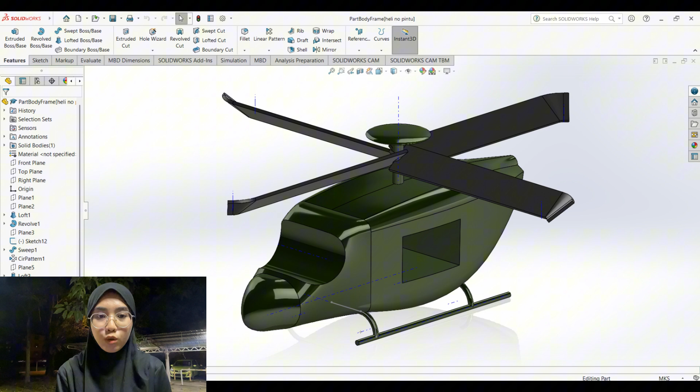Set the lines to tangent with the circles and trim any unnecessary sections. Add 3-point arcs at the top and bottom, making sure they are coincident with the sketch. Once all parts are complete, apply an extrude boss and your main body design is done.

Next, for the blade design, we start by sketching the airfoil profiles using the sketch tool. This defines the aerodynamic shape. Then we use the loft boss or base tool to create the 3D blade by connecting multiple cross-sections. To refine the shape, apply fillet for smooth edges, ensuring better airflow.

Next, we move to the hub design. The hub is created using the extrude boss or base, or revolve boss or base tool, to form a cylindrical base. Add holes or slots, use the hole wizard for attaching the blades and apply chamfer or fillet to reduce stress concentration and improve aesthetics.

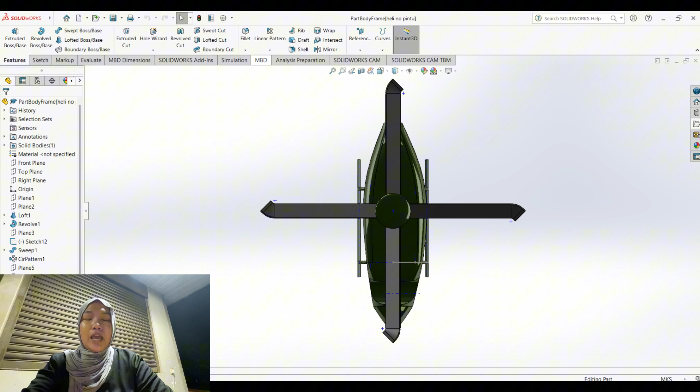Once the components are ready, we assemble them in the assembly environment. Use the mate tool to position the blades on the hub accurately.

For the first step, select plane 1, the neck point of the heli, and click New Sketch on the plane 1 menu.

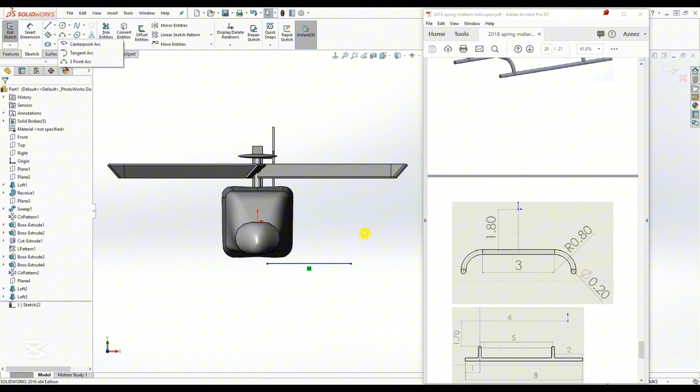Draw the bottom part of the heli and let it snap at 180 degrees. Then pick 3-point arc and randomly select any part.

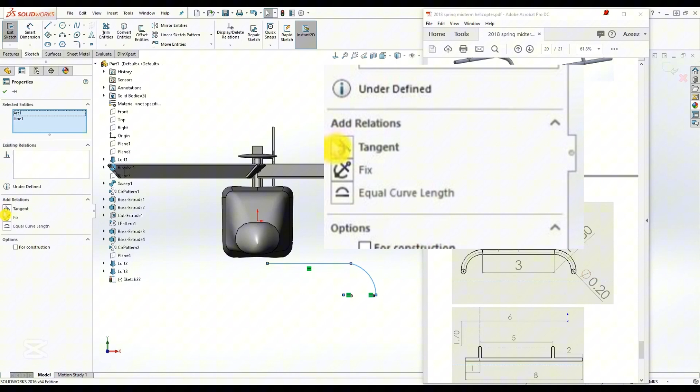Realign the bottom part and the radius, making it horizontal for the bottom and the upper part vertical to each other. Don't forget to make it tangent from the arc to the straight line to ensure they are connected. Realign the straight line vertical to the origin.

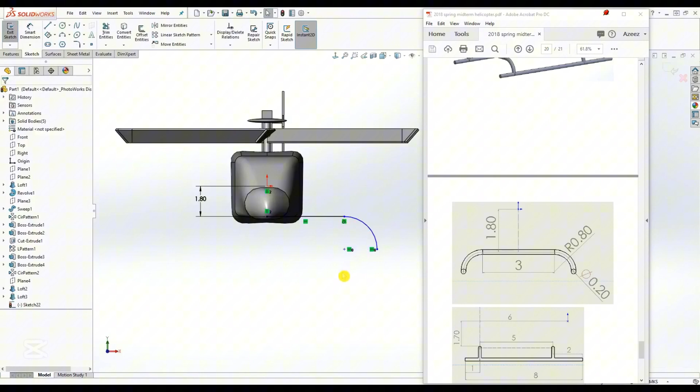Set the height of the heli and landing gear using smart dimension, around 1.8 units. Use smart dimension on the straight line sketched before, set around 1.5 units. Set the radius of the arc to only 0.8 of the smart dimension.

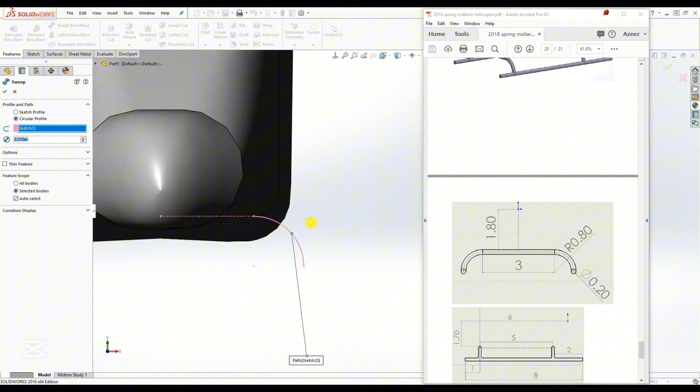Exit the sketch and use the sweep boss feature. Below it, set a different path and profile. Click on circular profile to make it look like a tube. Select the sketch and enter a value of 0.2 units, then enter.

Keep in mind, in the first part we created a new sketch on plane 1 just to make sure the sketch has its own boss, as it's been given the volume to stand alone by itself. This leads to no errors once extruded, since it is not connected to the other part.

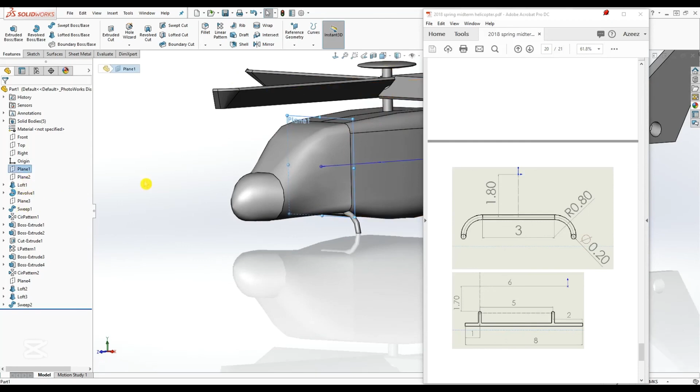Select the reference and select plane 1, then flip the offset. Offset it by 5 units and enter.

Create a new plane, copying the sketch by selecting the previous sketch of the sweep and using convert entities. Redo the whole session.

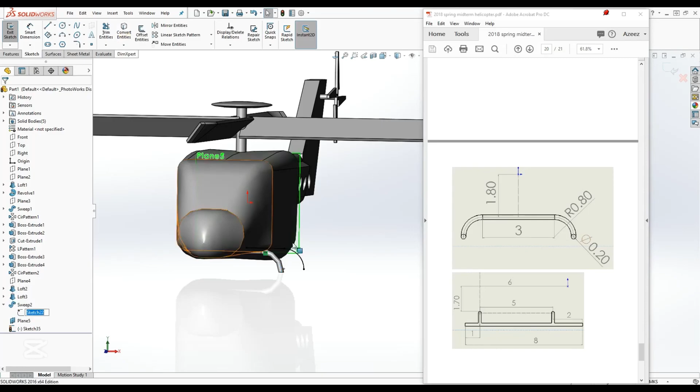Open a new sketch on plane 1 and reopen the latest sketch as a guideline. Draw a circle and set the dimension around 0.2.

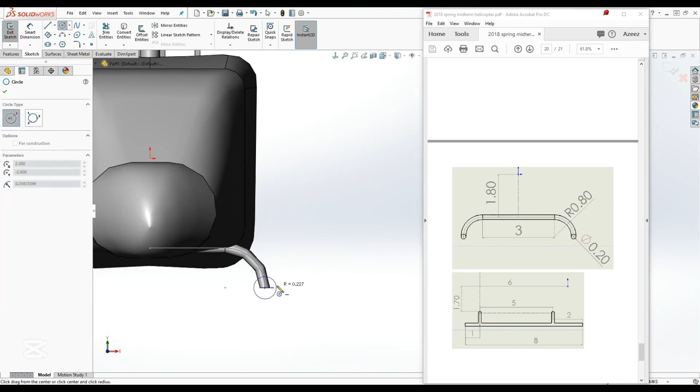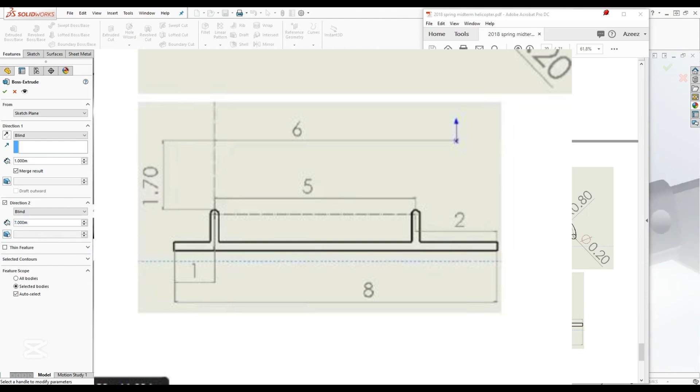You can extrude it for the front as 1 unit for direction 1, and pursue direction 2 for 7 units. In total, direction 1 plus direction 2 gives you 8 units, which is the dimension we need. After that, you can mirror it.

And that's all how you draw the landing gear.

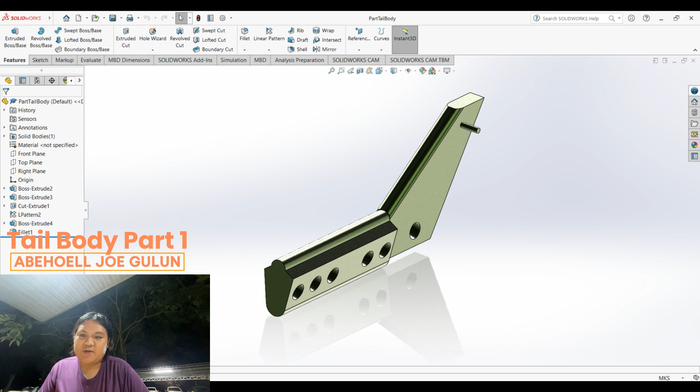So now I will show you how to create this tail body step by step in SolidWorks. First, start a new part and select the front plane, then use the rectangle tool to sketch the base profile. Define the dimensions based on your design needs, ensuring accuracy, and once done, use the boss extrude tool to extrude the base to the desired thickness.

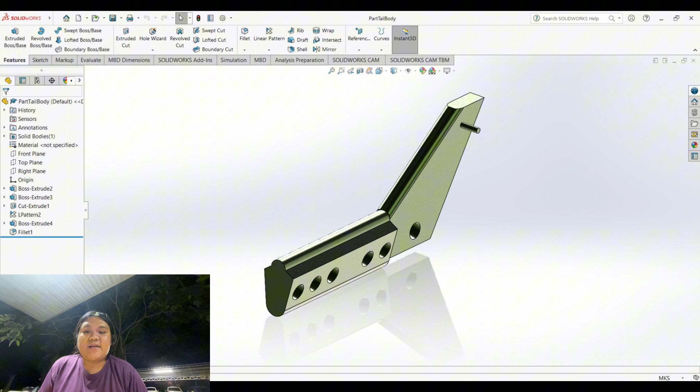Step 2: next, to add holes to the base, create a sketch on the top face. Use the circle tool to define the positions of the holes and apply dimensions for precise placement, then finish off by using the cut extrude feature to create the holes.

Step 3: to build the inclined sections, create a new sketch on the side face. Use the line tool to draw the angled profile, ensuring it aligns with the base. Then apply the boss extrude tool to extend this sketch upwards.

Step 4: to smooth the sharp edges, select the edges and apply the fillet tool. This enhances the part's durability and gives it a professional finish. Adjust the fillet radius as required.

Step 5: where design requires symmetry or repetitive features, use the mirror or linear pattern tools. This saves time and ensures uniformity in your design.

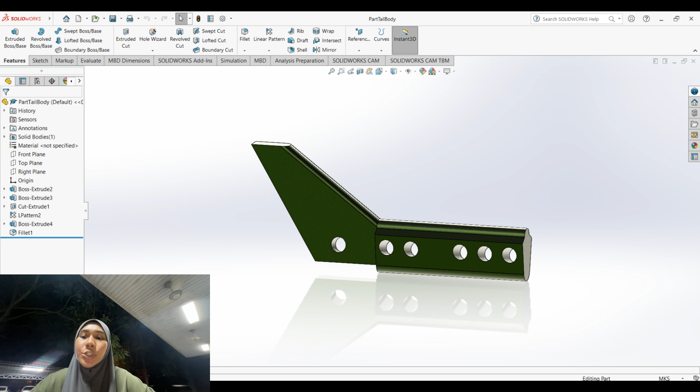For the final step, using a combination of boss extrude, cut extrude, and fillet features, you can easily create complex parts like this in SolidWorks. That's all from me.

Cockpit on helicopter. First, we need to sketch the outline. We sketch the outline using the front plane or top plane to create the cockpit basic shapes, whether rectangular, circular, or rounded, and then we also use tools like line, spline, and circle for detail contour. We also extrude the body using extruded boss base to give features and depth to our design.

We also add openings for windows. We sketch window shapes, which can be rectangular, circular, or custom based on our design on the cockpit surface. We also add details on the platform, tires, and the window.

Then we assemble components by importing or modeling additional components like dashboard, instruments, windows, and the platform. We use mate features in an assembly file to position the components.

We also apply material and appearance by using appearance to assign material like metal for panels, and we also apply realistic texture for better visualization.

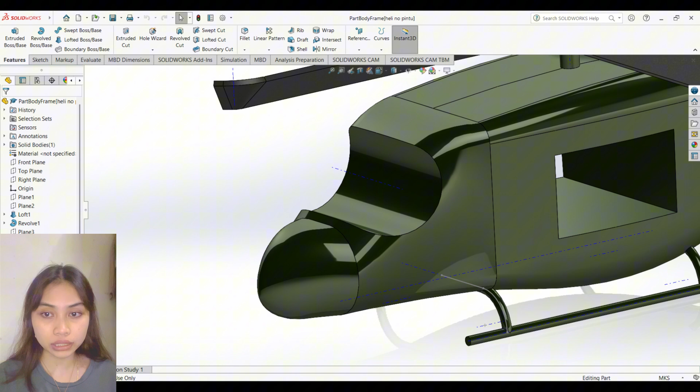We also add final touches, add fillets and chamfer to edges for a realistic look, and add decals for cockpit labels and screens. Next, we're going to make the pilot's mirror.

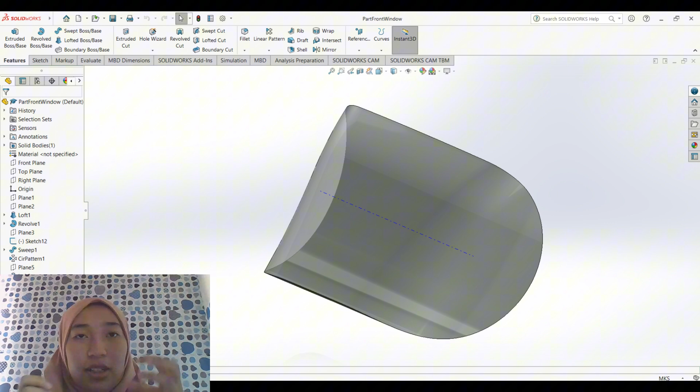First, we make a circle. We go to features and choose extruded cut and fill in the properties. We pick through all and tick flip side to cut. For the appearance, we choose glass and clear glass.

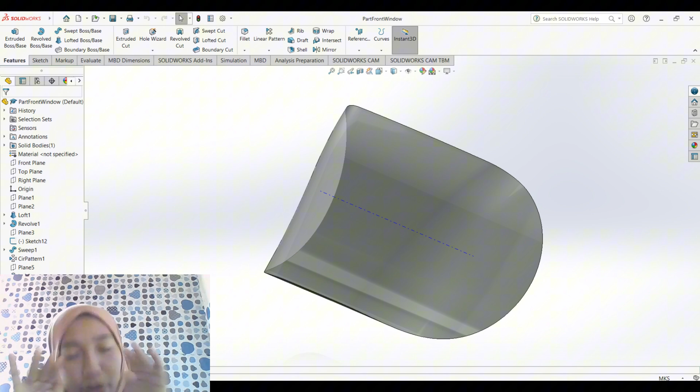So we are going to start the sketch for the rear tail propeller part. First, changing the sketch plane, we adjust the sketch to the right plane to make extrusion easier. Second, we create the initial extrude. After selecting the feature, extrude the sketch by 1 unit from the right plane.

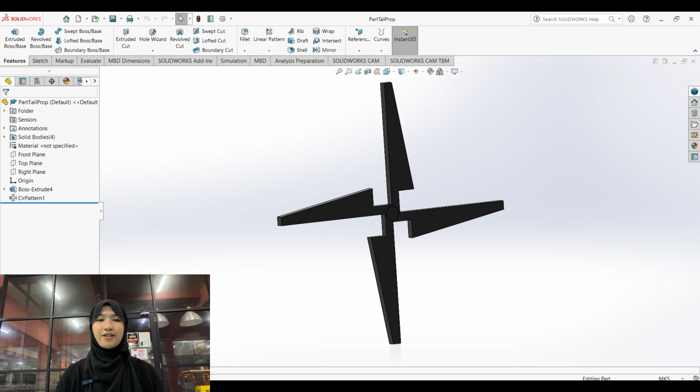Third, drawing the rear tail propeller: we begin by sketching a profile on the selected face, starting from the center point of a circle, drawing a profile resembling the rear tail propeller. Then we add dimensions to fully define the sketch - from origin, 3.85 units, between specific lines, 1.5, 0.3, and so on.

To extrude the rear tail propeller, select the sketch and extrude it in the opposite direction by 0.1 units. Ensure to uncheck the merge result option so that it remains an independent body.

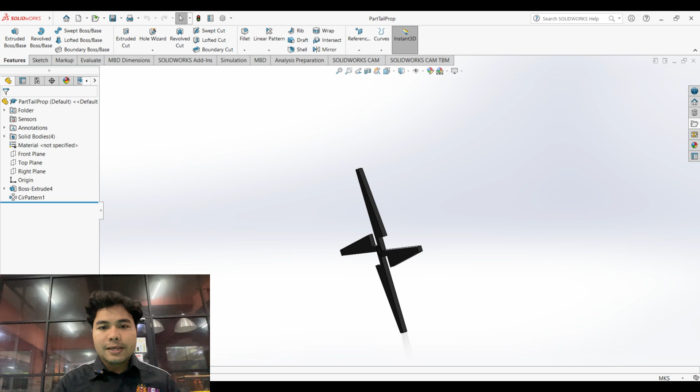Next, create a circular pattern using the circular pattern tool with the temporary axis as the reference. Set the feature to repeat 4 times with equal spacing, ensuring that the body, rather than just the feature, is selected for proper replication. Finally, hide the temporary axis to declutter the view for a cleaner presentation.

Alright, we will continue with the complex part of this design: assembling all of those parts. First, we open a new file and head to assembly, then open the file explorer and drag the main body part, tail body, and tail propeller part.

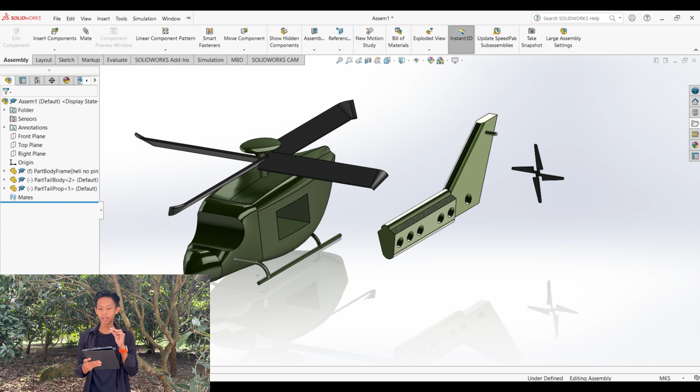Time to use the mate feature to assemble these parts. We cautiously pick a point on top of the front face of the tail, then pick another point on top of the main body on the back side and align it symmetrically. Next, we use mate again and select the half circle in the middle of the tail propeller.

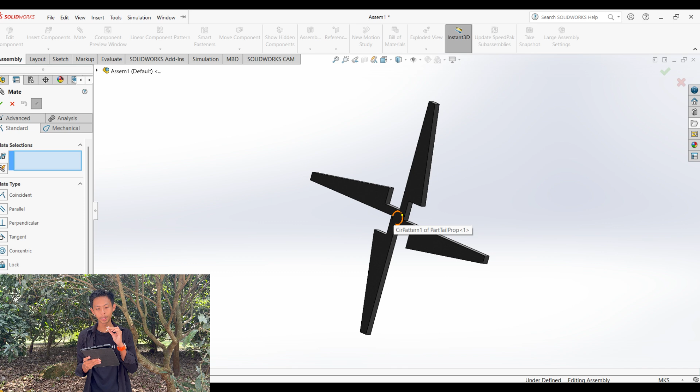Then select a circle sketch on the steel shaft on the top back of the tail body and align it properly. Now we've got 3 parts assembled.

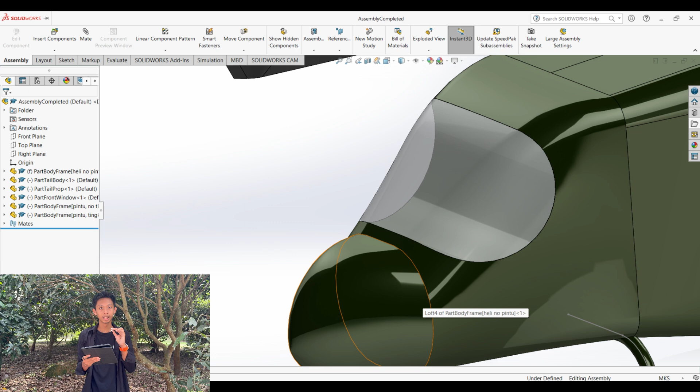Next, we open File Explorer again and drag the front window, the door, and the door window parts. For the front window, it's hard to attach without any point or line for automatic attachment, but in that case we purposely left the nose sketch with a point and line so we can use mate.

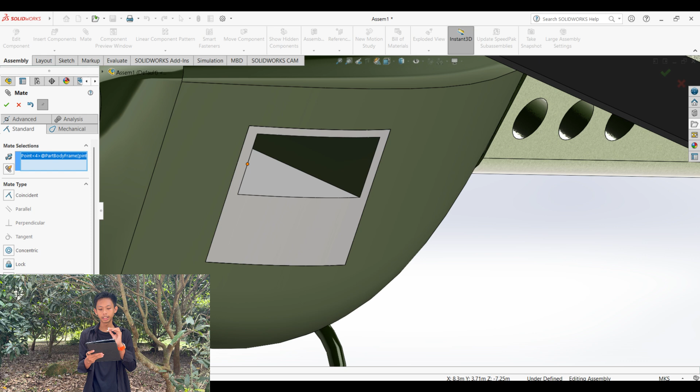We just mate those 2 points and the window is attached properly. We do the same thing to the door and door window. We left the sketch of the landing gear so we can use mate and select the point of the landing gear at the door designs and attach it, same as the door window. All parts are now done and assembled.

We hope our presentation can briefly explain to you about the Vietnam War Huey helicopter design. Thank you for watching.